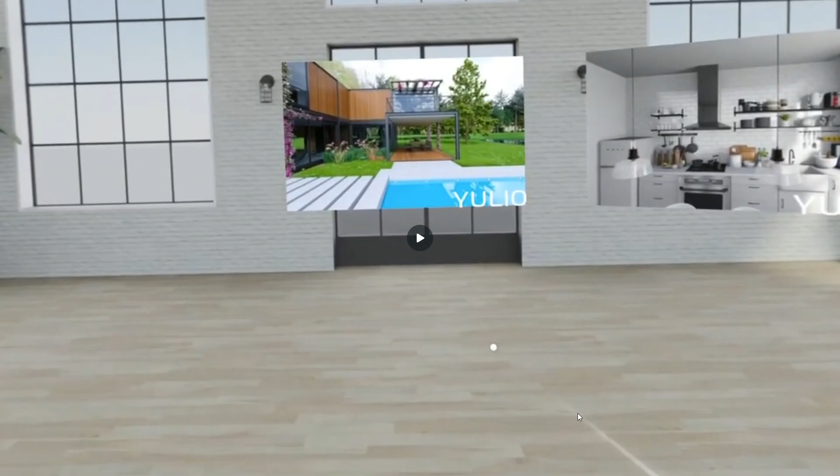Once the app has actually downloaded, the next step would be to connect your headset to your Yulio account. Start by opening the Yulio app on your headset, and you'll be taken to your company lobby.

The first time you download the app and open it, you'll be met with some in-app onboarding just to help you get started. Once you've completed the onboarding, this is what you'll see: your lobby, with some sample projects included as well.

To connect your headset, you're going to want to look down, find the connect button, and click on that. Then you're going to enter the email associated with your Yulio account.

Once that's done, you can click connect, and a confirmation email will be sent to you. At this time, take your headset off and open your email to confirm that you want to pair your headset. Once confirmed, your headset will now be paired to your Yulio account.

You can ensure your headset has connected successfully by logging into your Yulio account from your desktop. Here I've logged in to my Yulio account. To check my headset status, I can go over to this Headsets tab by clicking on this button.

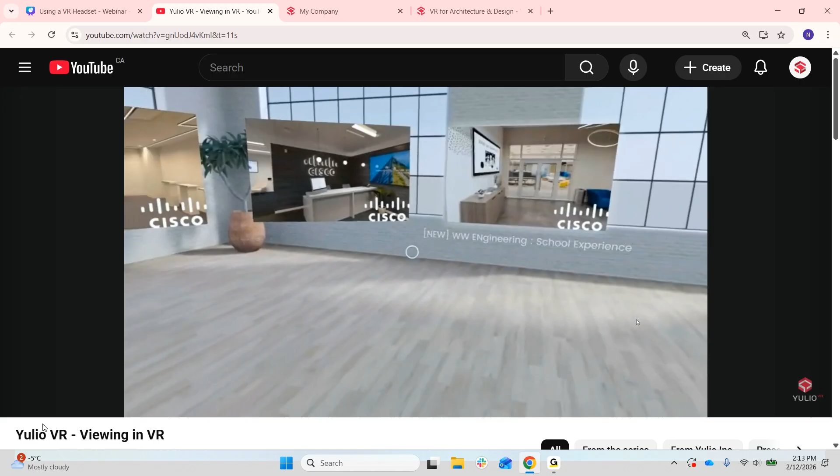Now, after putting on your headset and opening the Yulio Viewer app, you should see something like this. So we are currently in this person's company lobby.

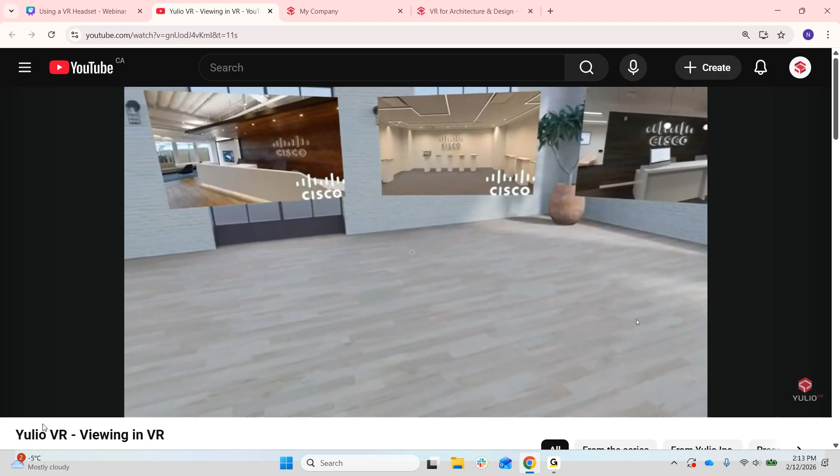You'll see shortly that they're going to go ahead and set their hand controllers down. When they do this, you'll notice a message on screen that says Gaze Control Active. Gaze Control is another feature that we have that helps make the viewing experience as simple as possible. So instead of using your controllers to select projects and click on hotspots, you can just use your gaze.

So they're going to hold their gaze over one of the projects to open it, and that's how you activate hotspots or click on things, just by holding your gaze over them. As this person looks around, you'll notice these solid white circles in the middle of the screen. This is a navigation hotspot. As they look around, this small gaze indicator is what they'll use to click on things, navigate to new scenes, activate hotspots.

If you prefer, you can always pick up your hand controllers at any time and use those to activate hotspots. So if you're familiar with viewing in browser mode, viewing in VR is very similar. There are a few different ways that you can navigate scene to scene.

The first is using navigation hotspots, which you saw this person already activated. Those are those solid white circles. Navigation hotspots are Yulio's form of point to point navigation. They help give a sense of walking through the experience.

I'm just going to go back to show you that again. So to activate the hotspot, you'll just place your gaze on the hotspot and hold it for a couple of seconds.

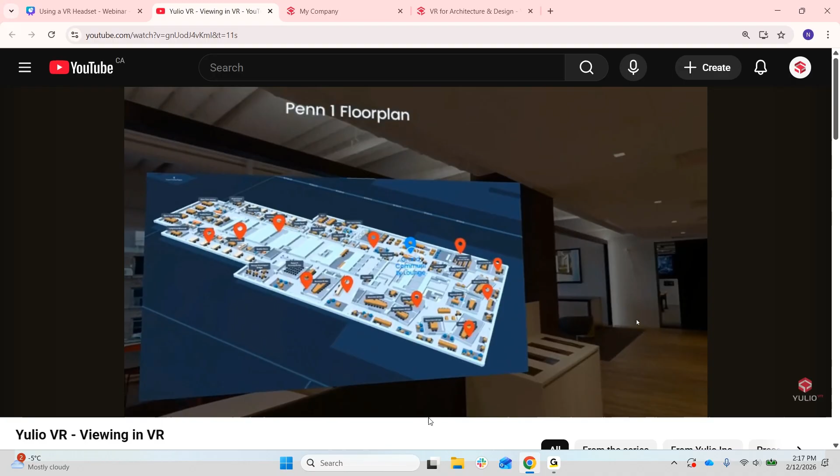And just like when you're viewing in browser mode, you can identify where you're standing in the project by the blue colored location marker. And then the red location markers are where you can navigate to just by holding your gaze over them.

So now we're back at the lobby area, and as you can see, there's various other enhancement hotspots around the scene, which again, you can activate by holding your gaze over them. As a reminder, Yulio's hotspot options include text, image, video, audio, and AR. You'll see this user is just going to go through and activate some of those hotspots in this project just to give you an idea of what they look like in VR.

Now, if you look down and open that menu again, there's a button to exit the project, and that's how you can return back to your company lobby.

Okay, now I'm going to go back to my slides and show you one more video. This is to give you an example of what you'll see when you open an AR hotspot in a VR headset. AR hotspots allow you to view project elements in full 360, and when viewing in a headset, they appear as a digital overlay on your real physical space, so you can see how they fit into your own surroundings. For our furniture clients, this is a great tool for showcasing how a piece of furniture might fit in their existing space.

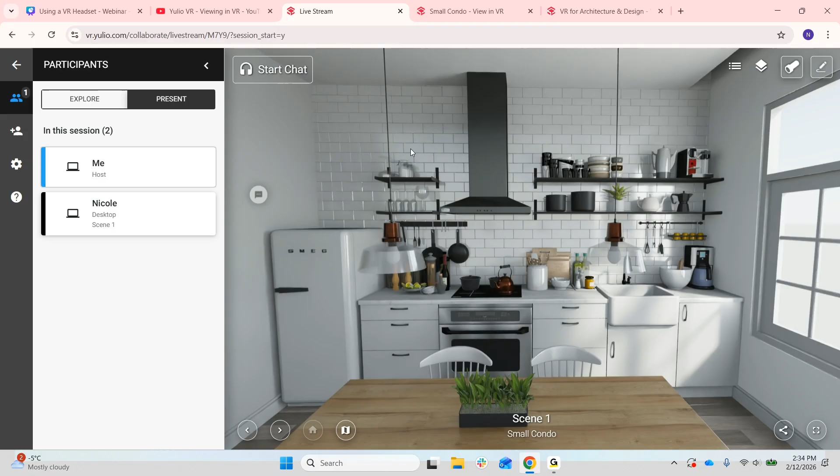That being said, your guest screens are not going to mirror your screen exactly. So even though you're in the same scene, they might be looking in a different direction than you. As the host, what you can do to direct your guest's attention to a certain area is use the spotlight button at the top right side of your screen. It looks like a flashlight.

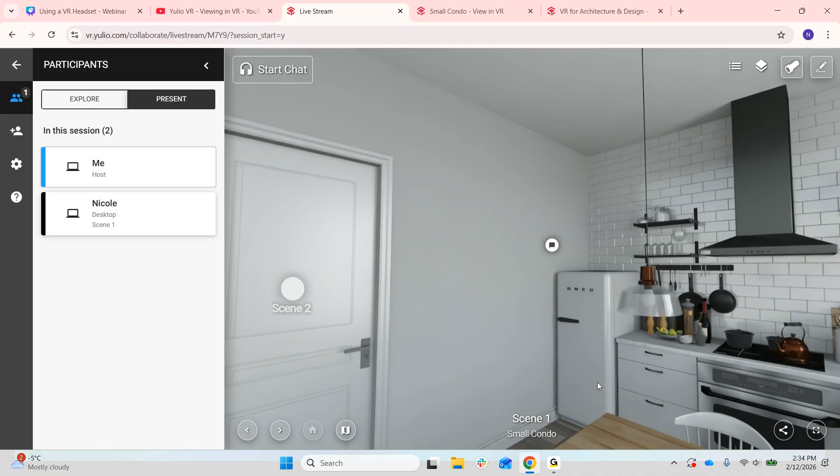So let's say I wanted to move your attention over to this text hotspot. I can move my gaze over there, and then select the spotlight button, and that will redirect everyone's attention over to this hotspot. If you join the session, you should notice that your gaze has moved in the same direction as mine.

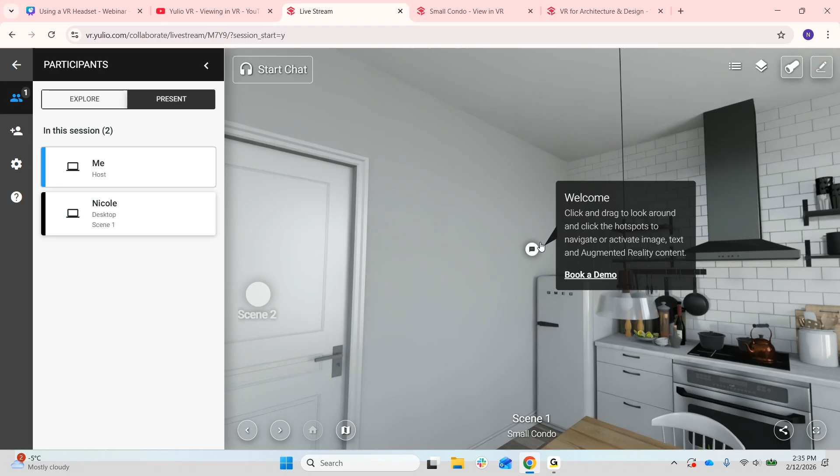Okay, so here's our text hotspot. And you'll notice as well when I click on that hotspot, it should open up on your screen also.

Now I'm going to go ahead and click on this navigation hotspot and move to our second scene. As you can see here, we are viewing this scene from a new perspective.

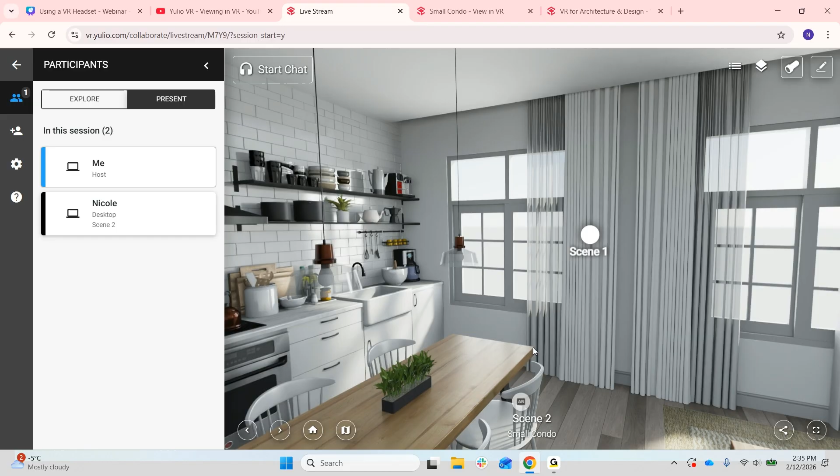And we can continue activating hotspots here as well. So there's an AR hotspot. I'm not going to open that, but this is the browser mode experience. So from a desktop, you can still view AR. It just kind of allows you to view that object in full 360.

And here's an image hotspot. And we can also open up a floor plan here as well.

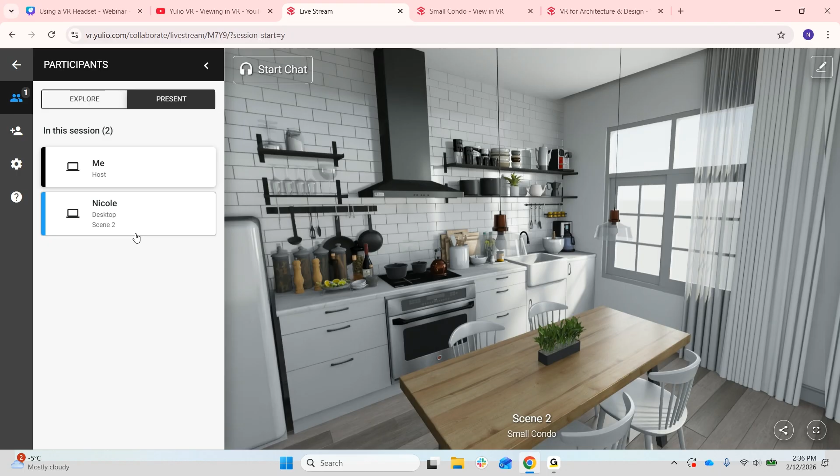So while in present mode, as the host, I can also give presenter privileges to my guests at any time. To do this, I would just click on their name. From there, they'd be able to take control of the presentation by activating hotspots, looking around the scene, moving to new scenes, and so on. Then to take back control, I could just click back on my name.

Now, in addition to present mode, we have explore mode. So I'm just going to click on that now. In this mode, all guests can explore the project freely, including activating hotspots and navigating to new scenes.

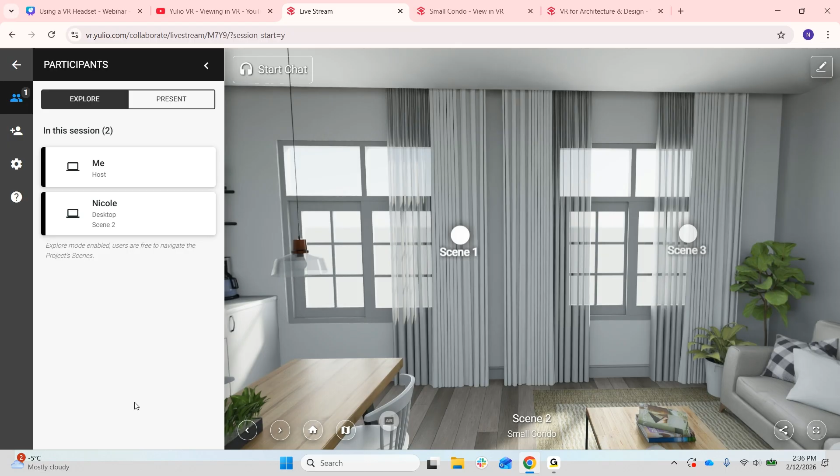While you're in explore mode, this mode will cycle through each guest view every 10 to 15 seconds on your end so that you can see what your guests are looking at and where they're exploring in the project. Again, if you're in explore mode and you want to take back control, you can just click back on present.

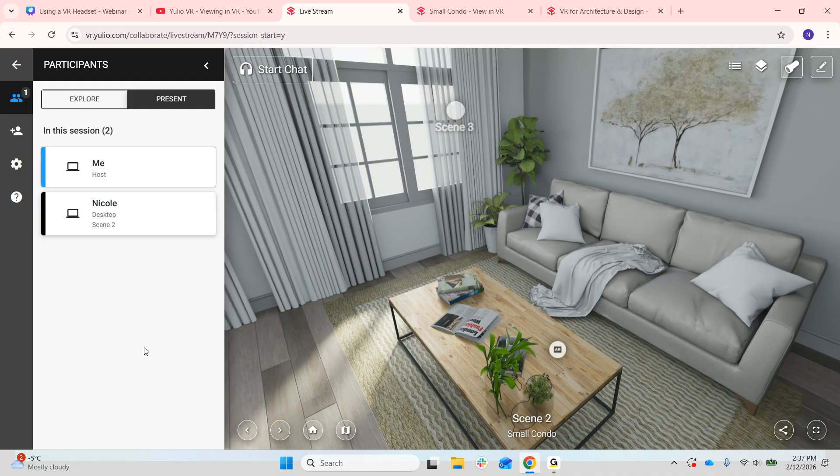All right, so that will end our collaborate session. I'm going to just exit that.

And that wraps up today's webinar. So I hope that you were able to learn some helpful tips for setting up your VR headset and viewing and presenting in VR. I appreciate you all for joining me today.